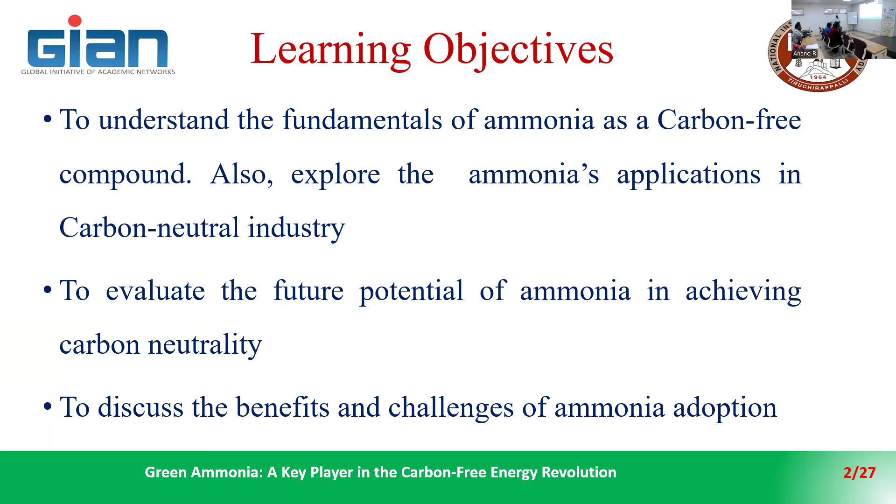Wherever possible, either by some percentage of replacement with conventional fuel or the sole replacement in industries, we can think about bringing in ammonia, that is green ammonia. By replacing conventional fuels like coal and other liquid or gaseous fuels, we can reduce the carbon dioxide emissions coming out from the industry.

By the end of the presentation, we can understand how to produce green ammonia, what is carbon neutrality, why ammonia is important for carbon neutral industries, the role of ammonia applications, and the challenges facing green ammonia.

In general, the major industries we are focusing on conventionally - about 80% of the power comes from the conventional way of thermal power plants. The maximum power generated is used for different industries, particularly mining, food, leather, cement, petrochemical, and agricultural industries. The major focus is how to replace the usage of conventional fuels.

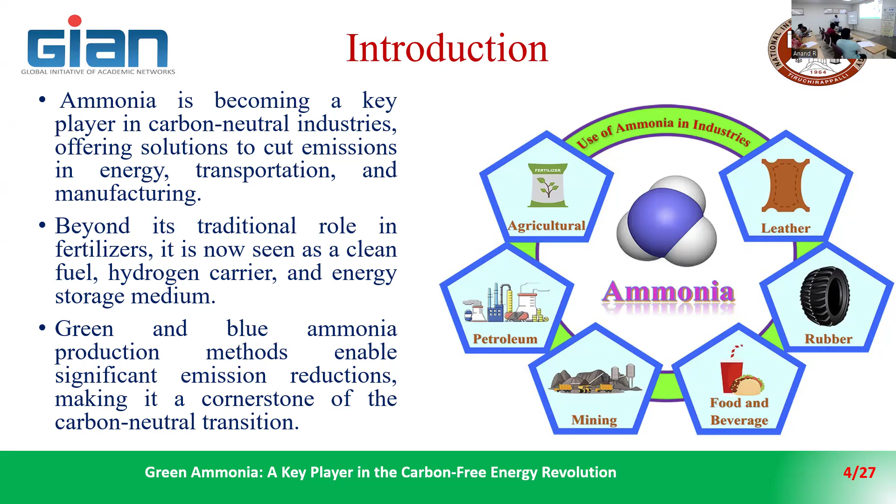Ammonia has become a key player in carbon neutral industries, offering a solution to cut emissions in energy, transportation, and manufacturing. Beyond its traditional role in fertilizers, it is now seen as a clean fuel, hydrogen carrier, and energy storage medium. Green and blue ammonia production methods enable significant emission reductions, making it a cornerstone of the carbon neutral transition.

Low carbon ammonia is expected to reach 420 million tons, making up two-thirds of the market according to global commodity insights. Decarbonization policies are driving its shift from fertilizer production to energy applications like marine fuel and hydrogen carriers. This transformation is forecast to boost global ammonia trade tenfold, with major exports from the Americas and Australia and high demand in Europe and East Asia.

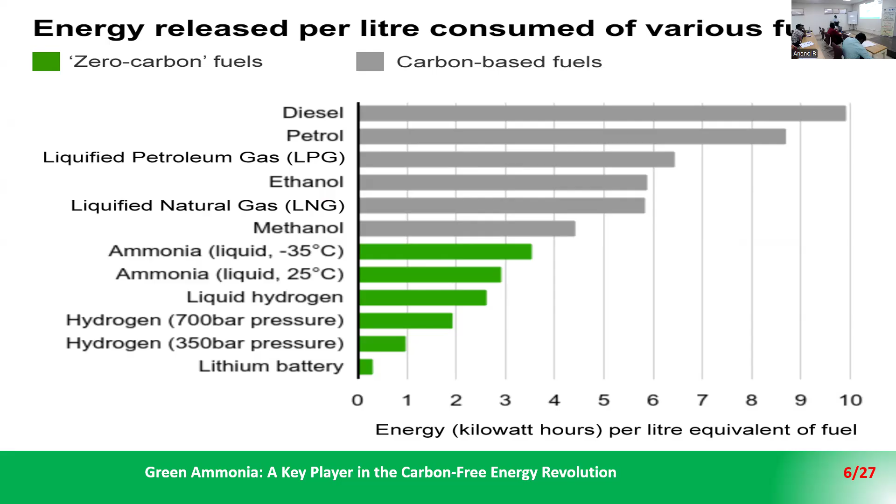So the green ammonia chain is divided into different categories: renewable energy production, plasma water interface, energy carrier, sustainability, reduction in fossil fuel. Ultimately, the ammonia comes out, green ammonia. If it comes through the green route by replacing the hydrocarbon, then you can say it's green ammonia. So here, the diagram talks about how green ammonia can be used in different sectors: aircraft, marine application, rail application, as well as road. So here the processes are there.

In order to produce green ammonia, you need to depend on green renewable energy. The renewable energy is wind, solar, as well as hydroelectric. Then the process involved for producing green ammonia is the electrochemical process. Then it is going to be converted into ammonia. The ammonia can be transported either in the gaseous state or in the liquid state for the different applications. Transportation through ship, or through the pipeline, is also possible. It's going to be used for different applications.

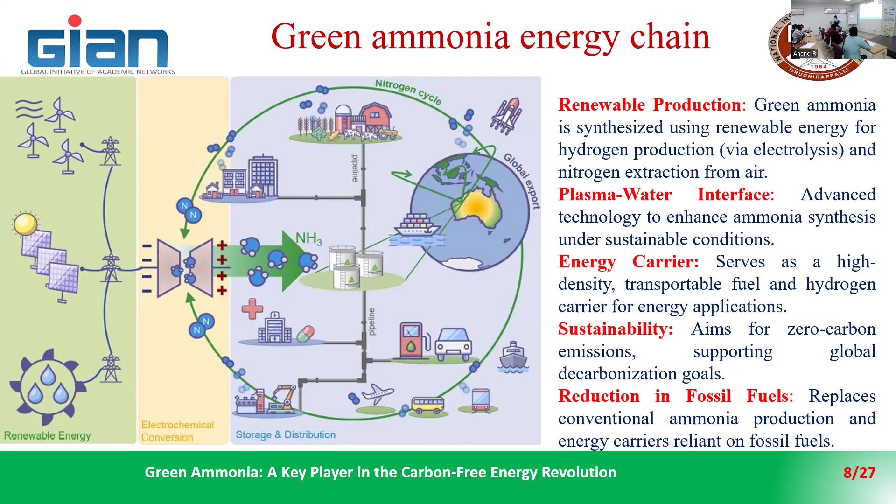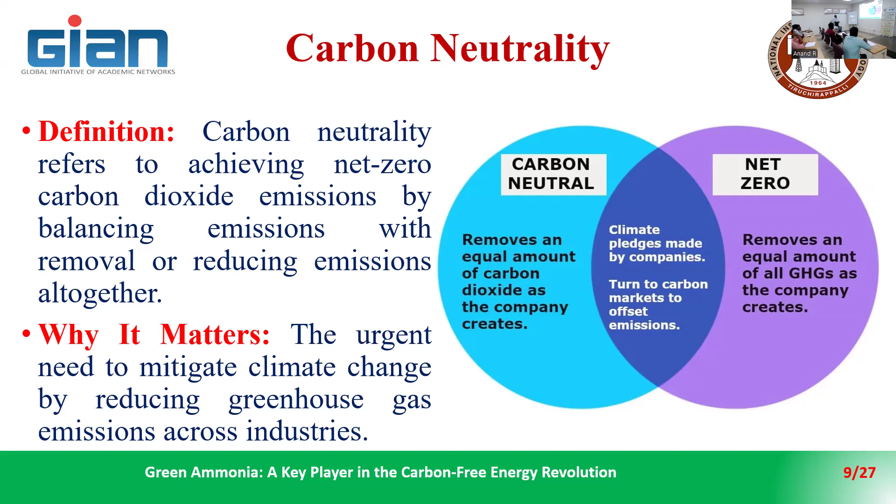Carbon neutrality. What is carbon neutrality? The definition is carbon neutrality refers to achieving net zero carbon dioxide emissions by balancing emissions with removal, or reducing the emission altogether. Okay, so you can see here carbon neutral or net zero. Carbon neutral means how much you are producing, how much is going to be absorbed. So 50-50. So I am producing 50 million metric tons of CO2. Same, 50 million is going to be absorbed by various sources, plantation or the agricultural fields. We can find out the method in which how much you are producing is going to be absorbed. So carbon is neutral. But ultimately, I am also thinking about bringing the carbon to zero, removing an equal amount of greenhouse gas as the company creates.

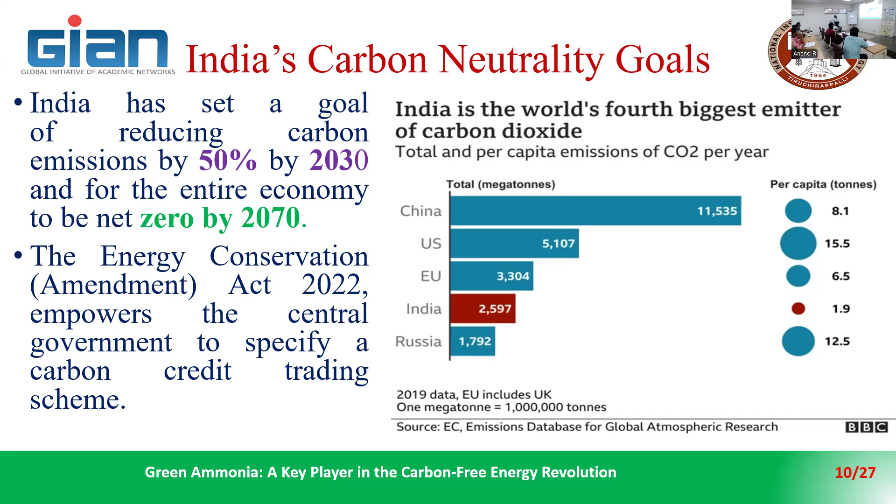India's carbon neutrality goals. China is the leading carbon dioxide emission producer. They are producing 11,535 megatons. US second, third European, fourth one. So India is the fourth largest CO2 emission country, followed by Russia. India has set a goal of reducing carbon emission by 50% by 2030 and for the entire economy to reach net zero by 2070. The Energy Conservation Act 2022 empowers the central government to specify a carbon credit trading scheme.

So, carbon neutral industries. So, how to go for carbon neutral? We need to consume minimum energy in the form of hydrocarbon fuel. So, what are the ways? You can see here, you produce the electricity from a renewable source. You incorporate into the existing system a carbon capturing system to absorb the CO2 before it is sent into the atmosphere. The carbon absorbed by the carbon capturing unit is going to be converted into e-fuel, synthetic fuel, that we can use in different applications, different transportation, etc.

Then the electricity, if you are supplying it to the electrolysis process, water can be converted into hydrogen. That hydrogen you can use in the different transportation sectors, or you can use the hydrogen in the fuel cell for producing electricity, which can be used for running different transportation sectors.

Okay. So the ultimate point here is you are not going to discard the actually available conversion system. You are able to reduce the CO2 level that comes out to the surroundings by capturing the CO2 with carbon capturing systems. Then the carbon dioxide captured from the conversion system is going to be converted into synthetic fuel, so waste to fuel you can generate. That can be used in whatever fuel system we are using for conventional fuel for running the different transport sectors.

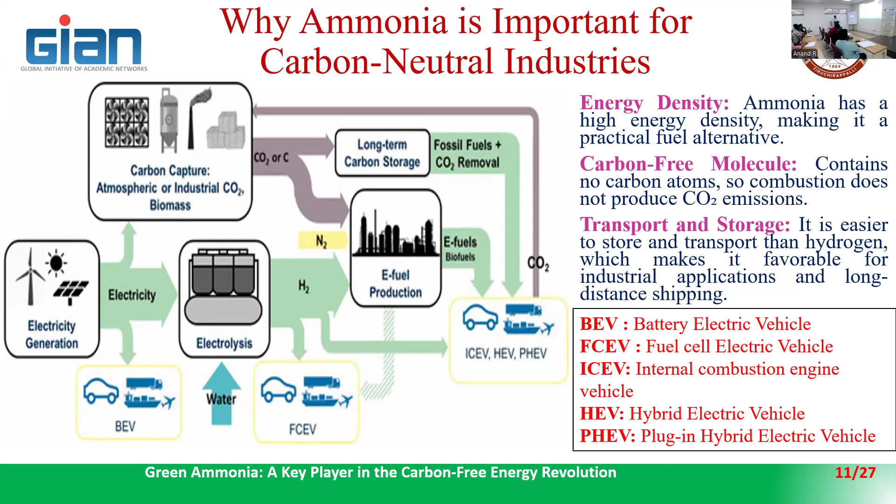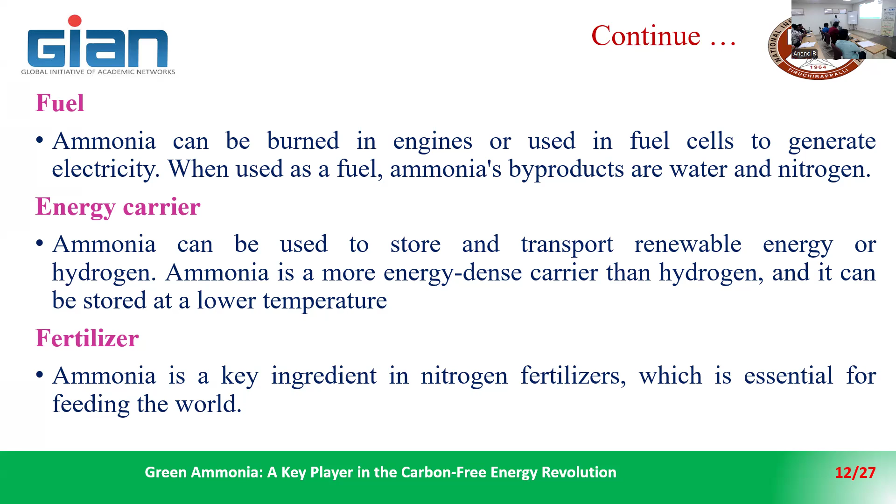So ammonia can be burned in engines or used in a fuel cell to generate electricity. When used as a fuel, ammonia's byproducts are water and nitrogen. Ammonia can be used to store and transport renewable energy or hydrogen. Ammonia is a more energy dense carrier than hydrogen, and it can be stored at lower temperature. So ammonia in general is used as a fertilizer to increase the yield. Ammonia is the key ingredient in nitrogen fertilizers. We are adding it in the form of sulfates or nitrates, which is essential for feeding the world.

So in order to decompose the ammonia, we are supplying two energy sources. One is power in the form of electricity, high grade energy. Another one, the internal combustion engine. After the combustion happens, you get the flue gas, which has a temperature around 600 to 700 degrees centigrade. That heat can be taken to the reformer to supplement some percentage. Suppose you want 100% heat, maybe 20 to 30% from the current source, 70% from the waste heat recovery system. It is used for decomposing the ammonia, then you produce the hydrogen. Hydrogen can be used for running the fuel cell.

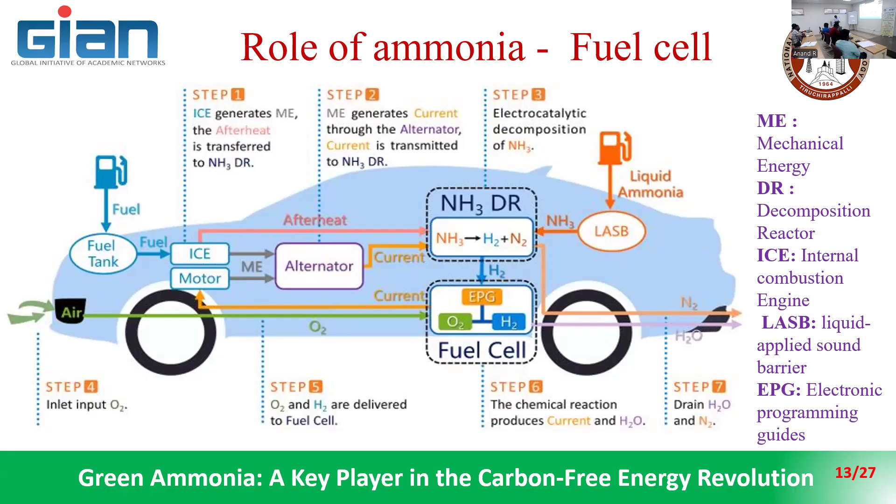The role of ammonia in fertilizer: in 2020-2021, around 180 million tons of ammonia were manufactured globally, 70% of which went into creating nitrogen fertilizer, with the remaining share used as an industrial chemical and pharmaceutical. So already we are producing ammonia, but people will not give ammonia just like that to run the engine or to run a steam power plant.

So this is more important. Food is more important than energy. If an excess amount is there, you can use it. So instead of depending on the ammonia used for fertilizer, you can produce ammonia for the particular application separately, rather than depending on the ammonia used for increasing crop yield, right? So you can think about ammonia generation which can be used for different sectors, not consuming the ammonia already produced by the process in different countries.

Green ammonia: by using renewable energy to power the process, we can significantly reduce the carbon footprint of fertilizer production. This transition can help ensure global food security while minimizing the environmental impact. Ultimately, they are saying green ammonia is only for fertilizer. Okay. So if you want to bring down the carbon emission footprint for producing ammonia or fertilizer, and also for running internal combustion engines on road or off road or in industries, that ammonia can be produced separately.

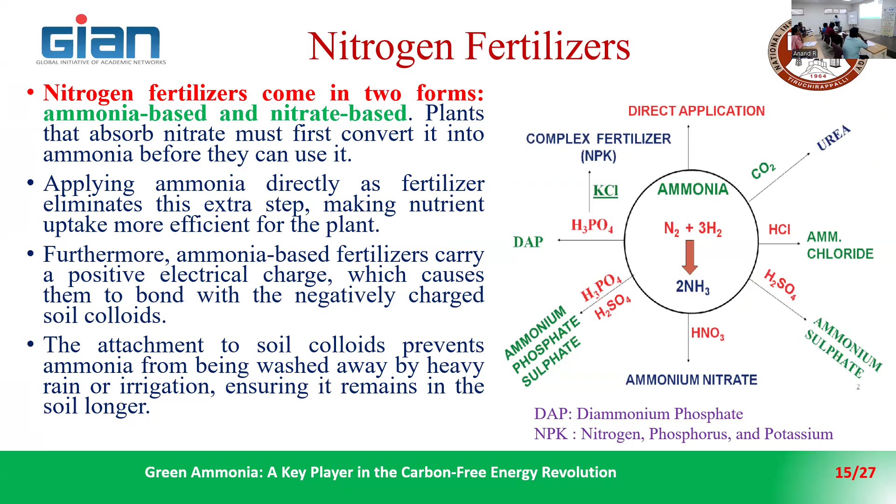So now the role of ammonia as an energy carrier. We are going to eliminate the conventional process and go for the green method: electrolysis, air separation unit, Haber-Bosch. Haber-Bosch is the process of producing ammonia. Then you need a cracking system to convert ammonia into hydrogen and nitrogen, and then there's the energy balance, right? Per ton of ammonia production, we are consuming about 33 to 38 gigajoules, 10 power 9 joules, per ton.

On the consumer side, to convert the ammonia into hydrogen for different applications, we are consuming about 8.4 to 10.7 gigajoules. In total, suppose you want to convert water into hydrogen which can be used as a fuel in the fuel station: 38 plus 10.7, you can assume about 49 gigajoules per ton of energy you need to produce one ton of ammonia or hydrogen.

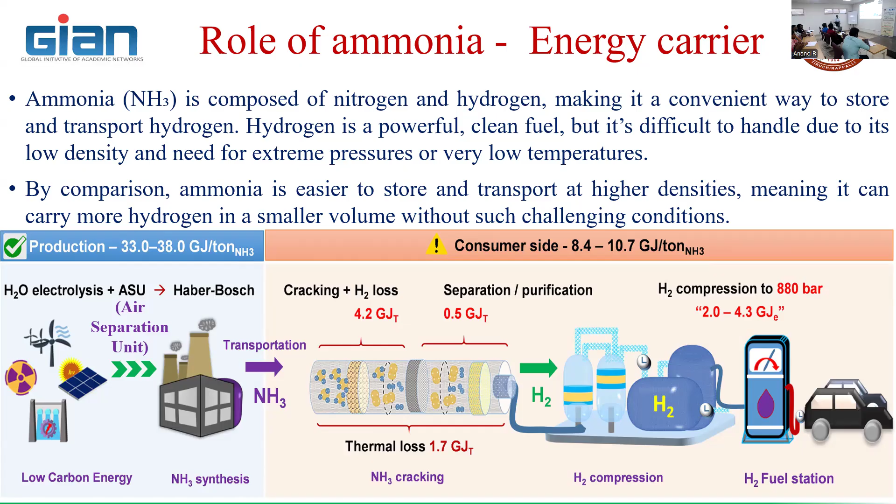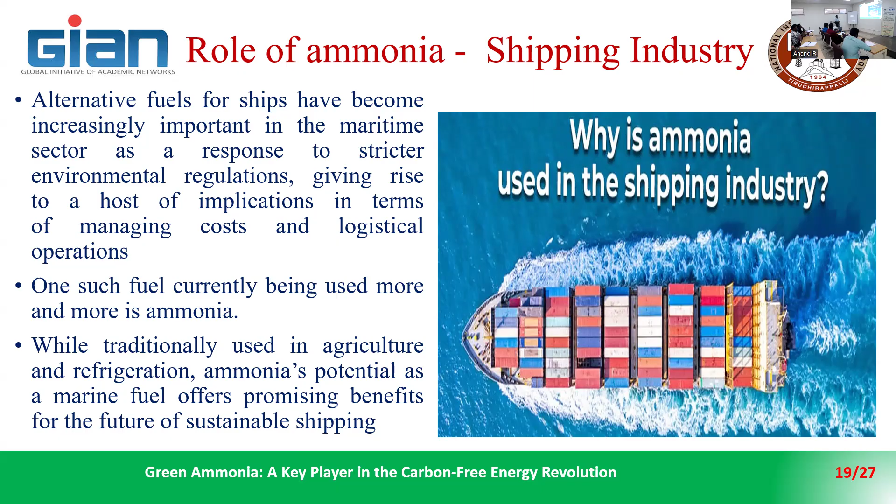The role of ammonia as a fuel. The major target is the ship marine industry. It consumes the maximum liquid fuel or coal, and produces the maximum CO2 in the marine sector. So their focus is majorly on the marine field. They are planning to use ammonia as a fuel for moving ships. Ammonia is also used as a fuel in the engine, as we already discussed. You can use it as a sole fuel, or as a blend.

Challenges of using ammonia as a marine fuel: toxicity and safety. You need to take care of it. Ammonia is toxic and requires stringent measures in handling, storage, and transport. Effective containment and monitoring systems are crucial. Engine technology and infrastructure, because it is highly corrosive in nature. All the components dealing with the fuel need utmost care in fabrication for a corrosion-free environment. Then oxides of nitrogen are going to be another issue.

Apart from the oxygen, nitrogen is supplied from the air, and we are also supplying nitrogen from the fuel. So NOx generation is going to be higher compared with diesel. With ammonia as the fuel, we need to bring some kind of technology. They can add a system on the exhaust side to bring down the NOx as per the emission norms.

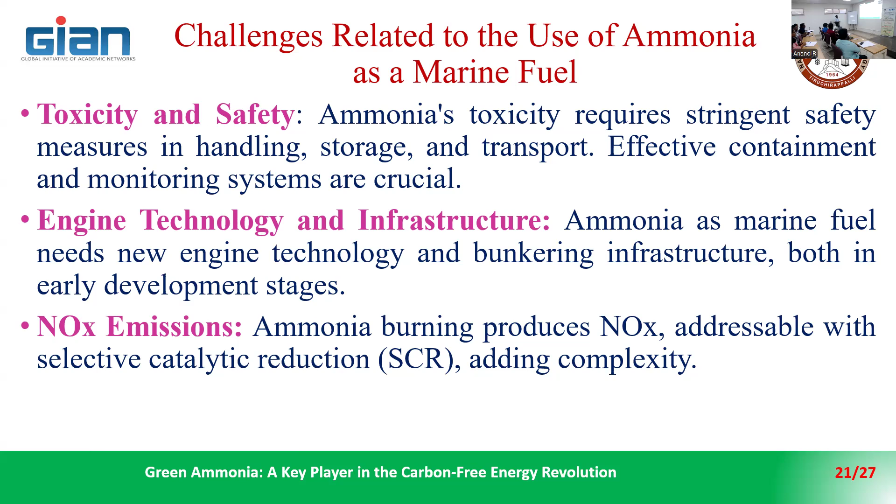Already in Japan, people are now using ammonia as a fuel in thermal power plants. 20 to 30% they are using. Their aim is to replace the coal with 100% ammonia. So they are currently going for 30% ammonia and 70% coal. They eliminate the carbon dioxide emissions to some level. But by 2030 or up to 2040, they are going to completely eliminate the coal to go for only ammonia as a fuel for all of them.

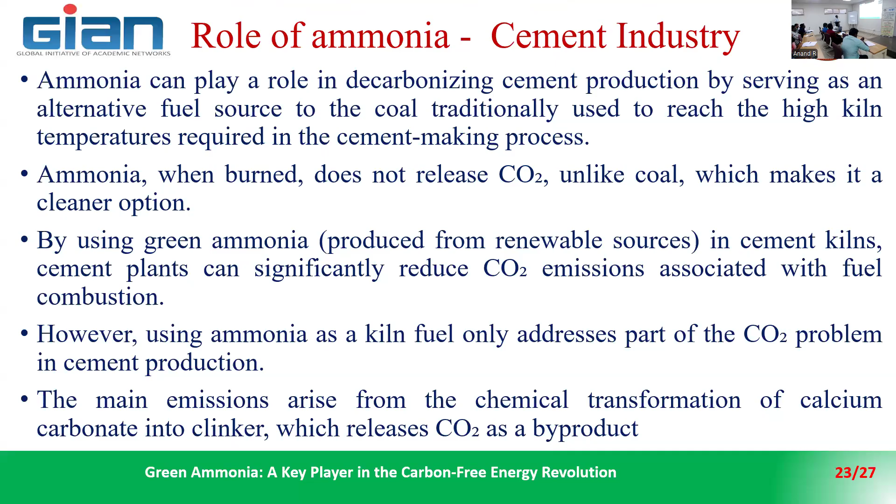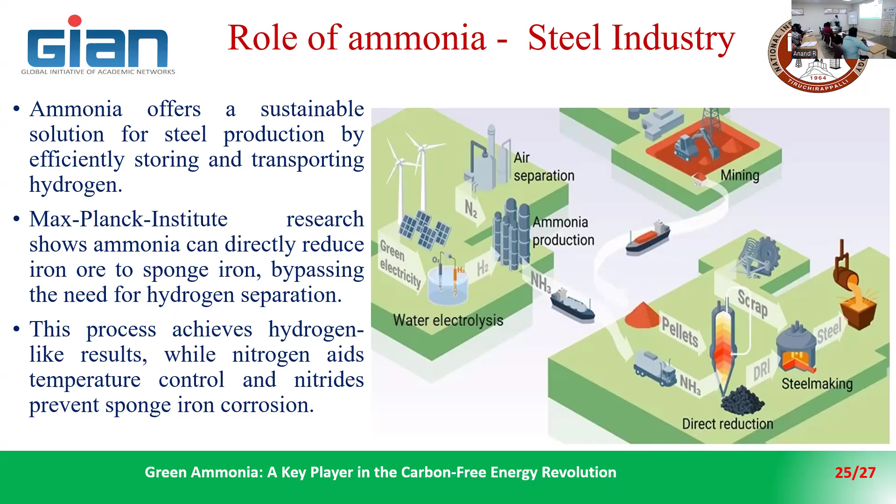Similarly, ammonia is going to play a major role in our steel industry. We need energy. So a lot of coal or a lot of liquid fuels or gaseous fuels are used, having carbon and hydrogen, as the heat source for melting this iron ore. So here, if you are going to use ammonia as a fuel in the steel industry, then we can bring down the greenhouse emissions.

In the cement industry also, a lot of energy intensive industries are able to use ammonia as a fuel, and we can bring down the emissions. So for getting to net zero carbon emissions by 2050: go for renewable resources, increase the solar and wind capacity 3.5 times, about 500 gigawatts. Eliminate most electricity generation from coal. Maintain current natural gas generating capacity for reliability.

Why are they saying natural gas? The carbon content in natural gas, in the form of methane, is comparatively lower than if you are dealing with, let's say, a high density liquid or coal, which has a carbon value more than, I can say, 5. So when you use a hydrocarbon fuel on the lower carbon side, the carbon dioxide which comes out in the products of combustion is going to be lower. That's the reason. Enforce usage of natural gas to eliminate liquid or solid fuel like coal, and we can reduce the CO2 to some level.

Then increase the zero emission vehicle sales share up to 50%. Increase the sales share of building heat pumps. So instead of using an electrical heater to heat the room, particularly in places like Srinagar and Delhi or the northern places where during winter the temperature goes very near to 5 to 10 degrees centigrade, instead of using an electrical heater, a high energy source, for maintaining a room temperature of 25 to 26 degrees, you can go for a heat pump. Providing the energy in the form of heat, we can reduce the energy consumed for maintaining the room temperature. So provide low grade energy rather than high grade energy, and you can reduce the CO2 emissions.

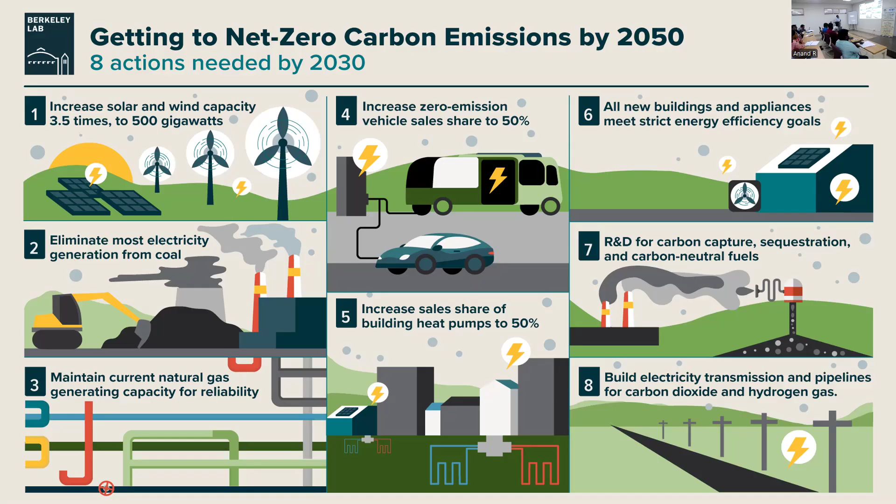So the outcome of the presentation is we cannot bring down the CO2 emissions to zero immediately, but there are ways to bring it down to zero. It takes its own time because we already damaged the environment. We can bring it very near to CO2 neutrality, first by bringing carbon-free fuel, used as a supplementary fuel in conventional systems like aircraft applications, steam power plants and gas turbine systems, and in energy intensive industries like the steel, cement, leather and pharmaceutical industries, bringing some kind of cogeneration system where we can use ammonia as a fuel to bring down the CO2 emissions. By doing so, maybe not in 2030, but in 2040 or 2050, we can become carbon neutral. How much we produce is going to be balanced.